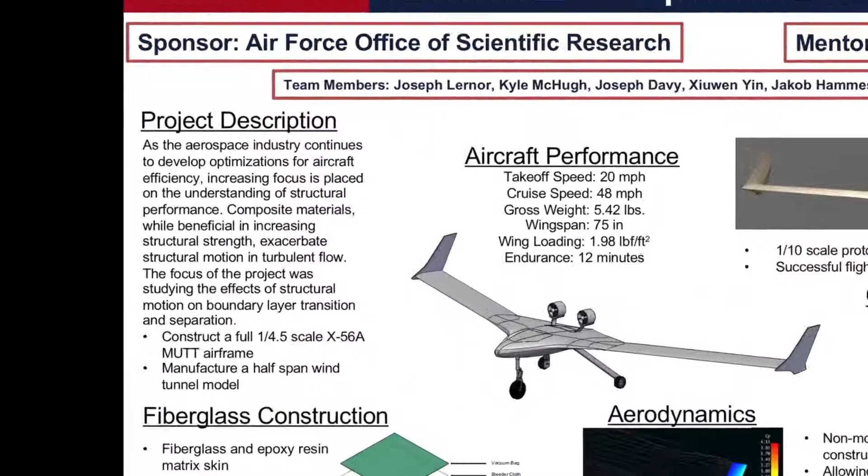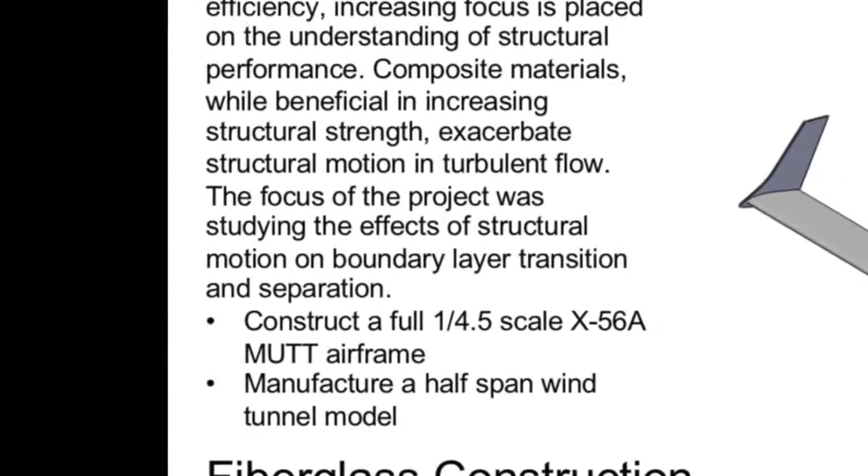The goal of our project is to design and manufacture a 1 to 4.5 dynamically scaled X-56A airplane, originally built by Lockheed Martin to serve as a research testbed to study the effect of structural motion on the boundary layer transition and separation. This project will provide future engineers an insight to safely design high aspect ratio flexible wings using composite technologies.

To begin each flight test, the X-56 will be placed on the runway. Once the pre-takeoff checklist has been completed, the pilot will apply full power and begin the takeoff roll. The aircraft should take off from a paved surface in order to minimize the damage from foreign object debris. As the drone approaches its rotation speed, the pilot will apply slight back pressure to the transmitter joystick to make the airplane lift off.

The airplane will start climbing, and as it reaches 100 feet, the pilot will slightly reduce power to conserve battery. Once it reaches an altitude of 300 feet, the airplane will begin to look for traffic and any areas of turbulence. After clearing the area, the drone will loiter for about 8 minutes to collect data.

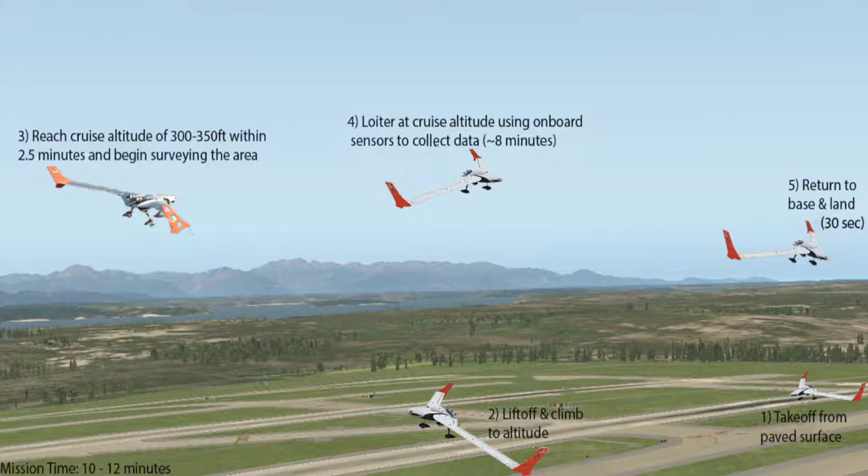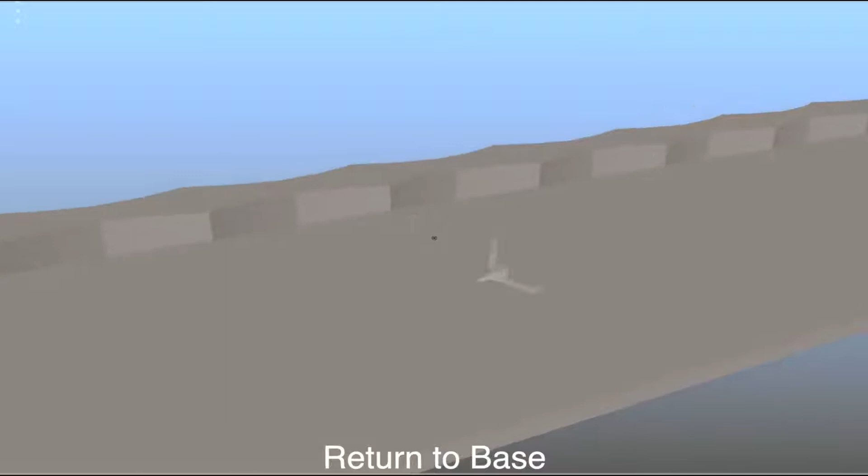During the data collection portion of the flight, the aircraft will utilize its onboard sensors such as accelerometers, bending sensors, and an FPV camera for the team to understand the effects of structural motion on the boundary layer transition and separation. Lastly, the aircraft will reduce power and return to base for landing. The total planned mission time is around 10 to 12 minutes.

The initial project proposal included the construction of a 1/6 scale model. However, the chosen internals did not fit within the fuselage, and as a result, a change to a 1 to 4.5 scale model was presented. This was the smallest scale possible that would allow the construction of the half-span model to fit inside the U-Arizona subsonic wind tunnel's test section.

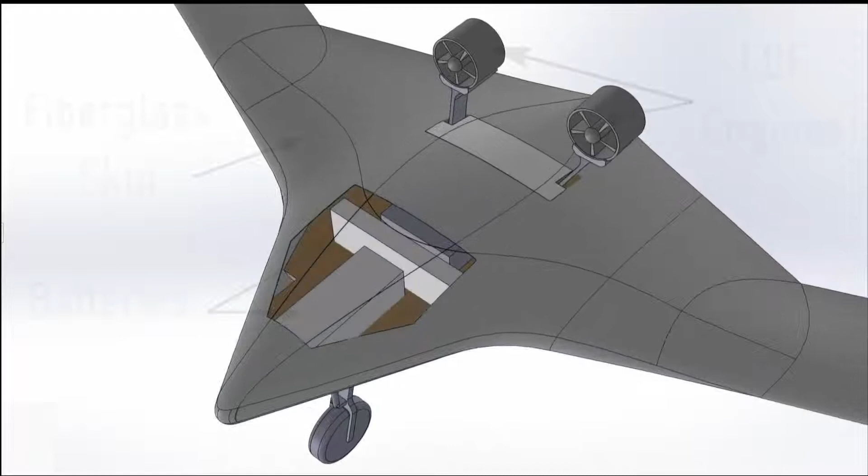Shown here is the SolidWorks model of the 1 to 4.5 scale X-56A aircraft. The aircraft is constructed with a fiberglass skin and includes 2 LiPo batteries with EDF engines conducting the propulsion system. These EDFs are supported within the fuselage by engine mounts shown here. Similarly, the internals, including the flight control system, will be supported by an instrument plate.

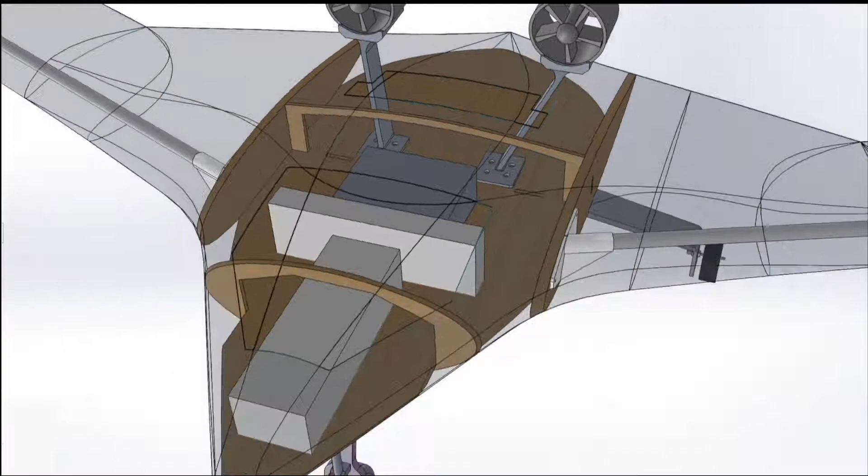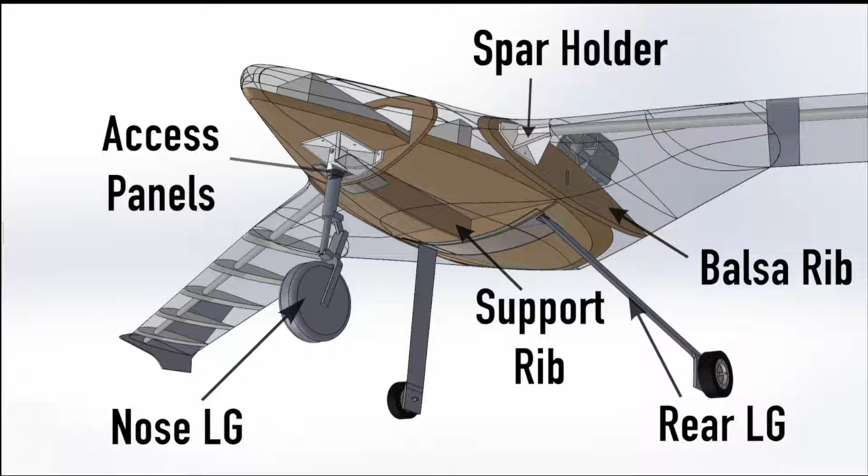The wing structure includes 3/4 inch foam ribs and telescoping carbon spars that allow for varying wing flexibility. The design also features winglets to reduce wingtip vortices. The aircraft also includes a tricycle-style landing gear formation and various other support systems, such as balsa ribs and spar holders contained within the fuselage. Access panels are included to provide easy access to the internals. Here is a full 360-degree view of the X-56A model.

This year's team created a non-modular design through the use of a one-piece mold. The benefit of this design was faster manufacturing, ultimately leading to more flight testing in the allotted time. The only downside to this marvelous design is it weighs 250 pounds, requiring at least a team of 4 to move it or to mate it.

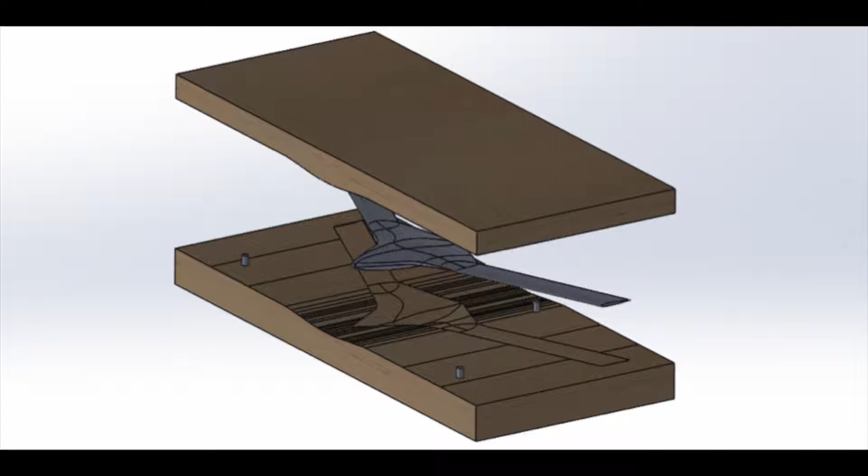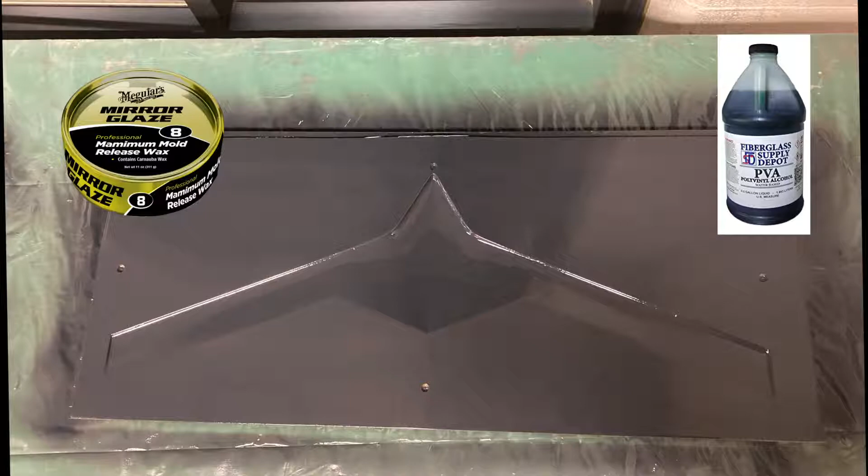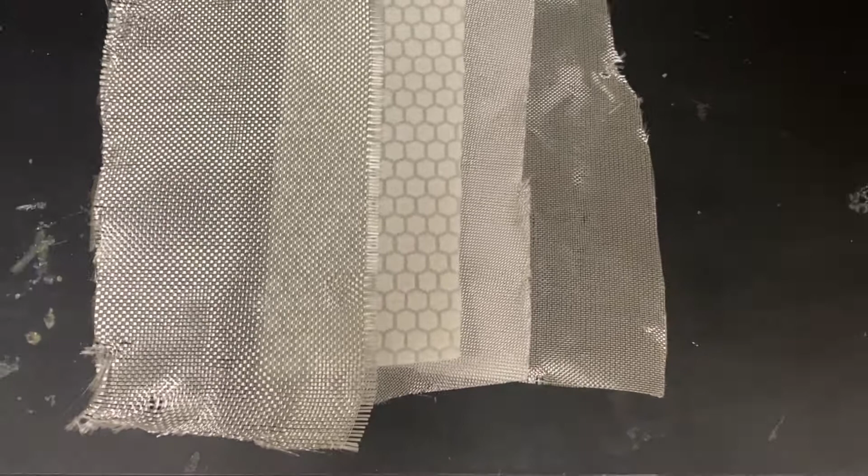To ensure our model does not bond to the molds, they are first waxed and buffed, then coated with a spray-on application of PVA. The skin of the aircraft is constructed using a fiberglass and epoxy resin laminate containing Aeromat core that runs through the center of the wing and fuselage sections for additional stiffness. It's determined to have 2 2-ounce layers of fiberglass on the exterior and 1 3.2-ounce layer on the interior. The exterior of the skin is made from gel coat to provide a smoother wetted surface in flight.

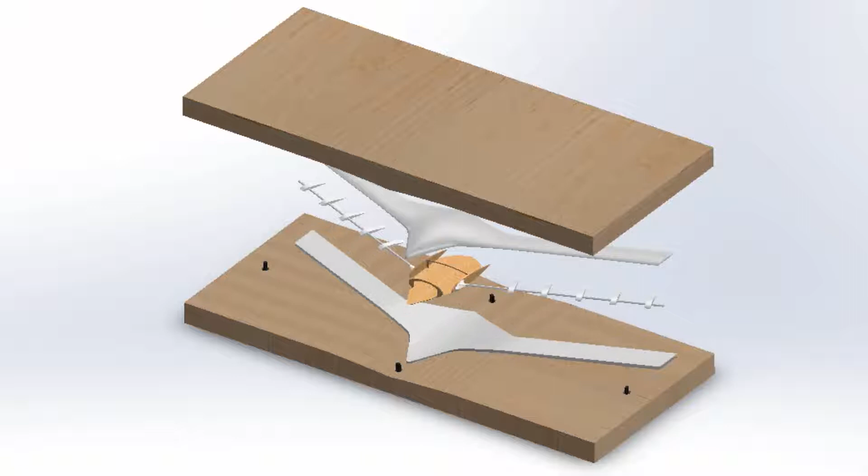In order to mate the 2 halves of the one-piece mold, the team used microballoons and epoxy. Prior to mating, the larger internal structures are placed inside the fuselage, and all central structural supports are secured in place. Diamond pins in 4 key locations are also utilized to inhibit movements in the mold during the mating process.

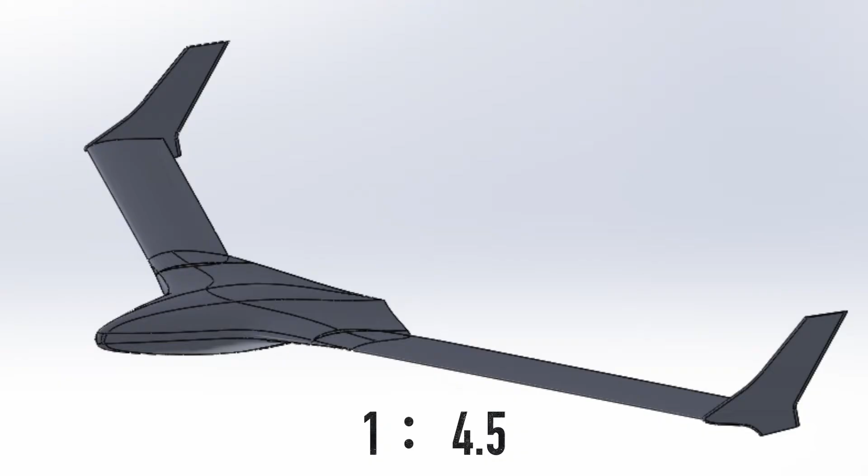Due to the interruption of COVID-19 and loss of access to school facilities such as the Composites Lab and Machine Shop, the new deliverables are as follows. To switch our focus to the half-scale model and complete an aerodynamic analysis as well as calculations through the use of XFLR5. We are additionally tasked to design fuselage and wing molds.

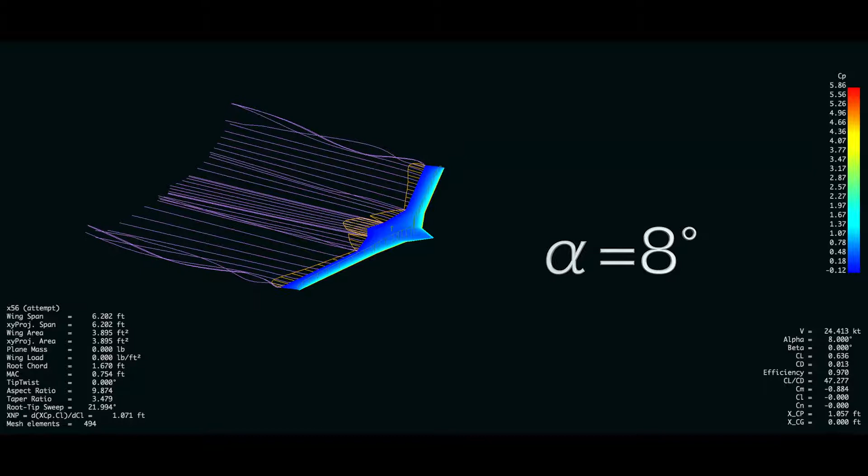To understand the performance of the half-scale model, aerodynamic analysis was performed utilizing XFLR5 simulations. From this, the aerodynamic coefficients were obtained and other relevant aerodynamic properties, such as the neutral point, were determined. Additional new deliverables included calculating a new center of gravity with fuel burn considerations, as well as a power analysis for the new scale engine choice. This information will prove insightful for future research concerning this project.

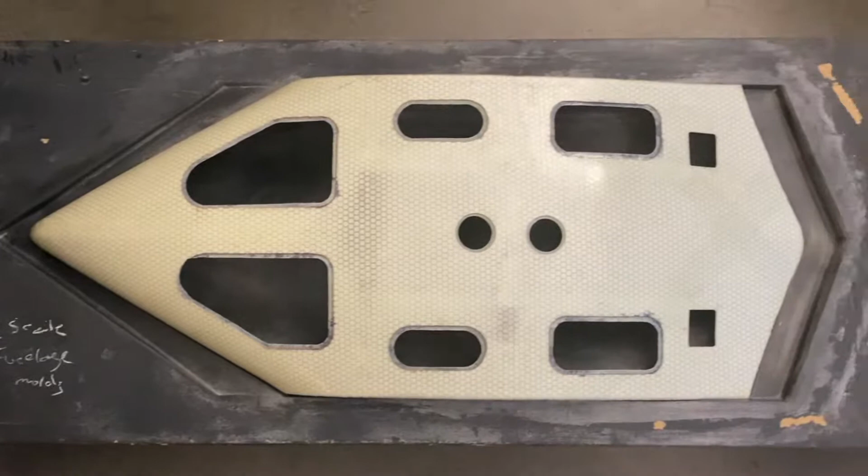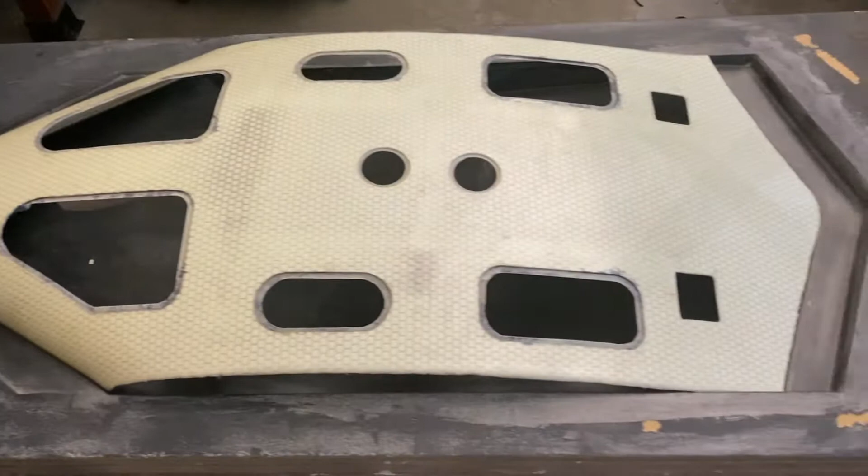The differences between the molds of our original and updated scaling are minor. The half-scale molds have separate sections for the fuselage and wings, creating a modular design. The plugs are to be male, to which an original layup will be done and removed, creating new female molds made entirely out of fiberglass.

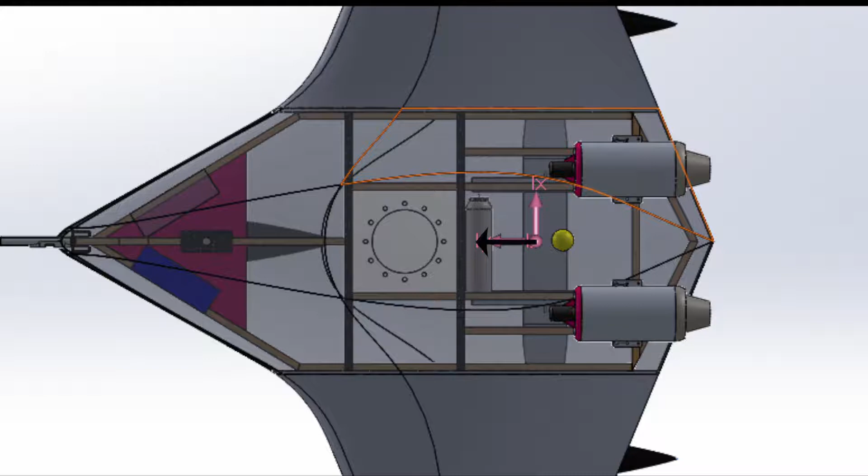The results of the half-scale model mirror those of the 1 to 4.5 scale model aerodynamically. The neutral point placement was determined to be about 67% of the fuselage length, with a static margin of between 5 to 10%. When determining the CG of the half-scale model, fuel burn from the tanks must be considered. As fuel is being burned, the CG moves further forward, increasing the static margin, however not increasing it beyond the 10% safety threshold. Although we were unable to gather physical data, our results were still useful to our mentor and sponsors.

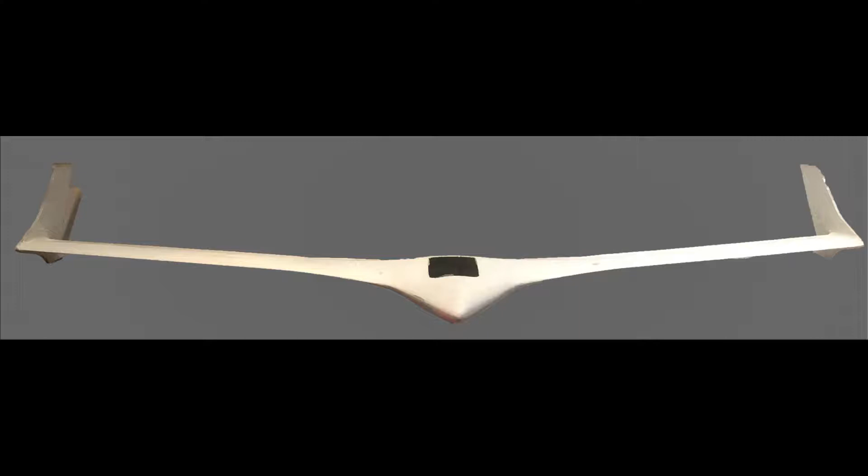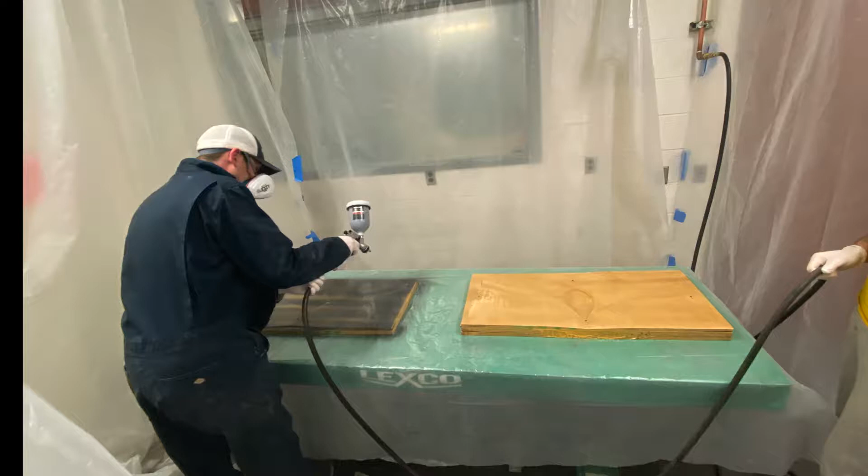In order to verify our design, a prototype was created. A 1/10 scale model was manufactured from a smaller scale mold using our original design. After routing the molds and doing test layups, we determined our mold design to be feasible. Prior to spring break, the team put in over 200 man-hours to prepare our molds for layups. This ensured we had a near-perfect polish for our state-of-the-art composite shells.

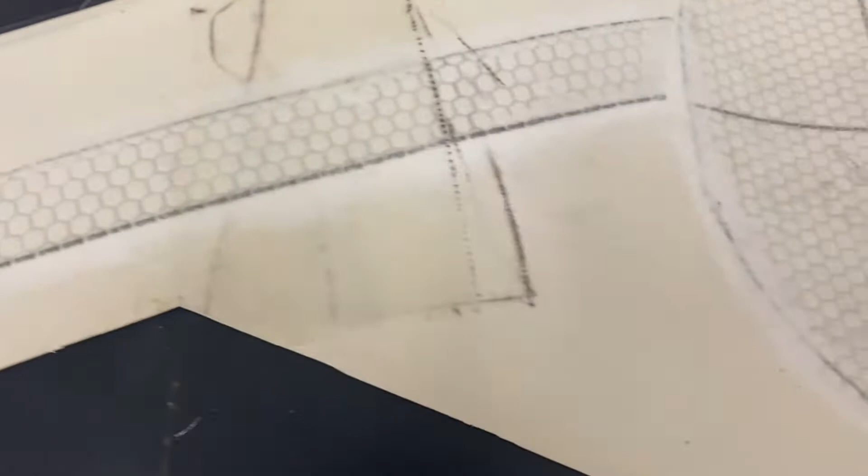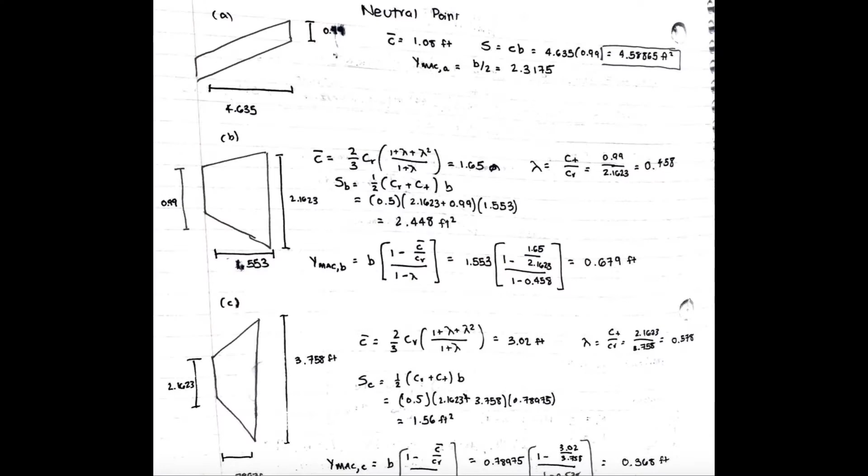Before the pandemic started, the team was able to complete one half of the aircraft. While the design and hard work of making the molds was completed, the aircraft will stay grounded and unfinished for the time being. Overall, we believe that this project and its results will be of use to future engineers focusing on structural motion in boundary layer transition and separation.